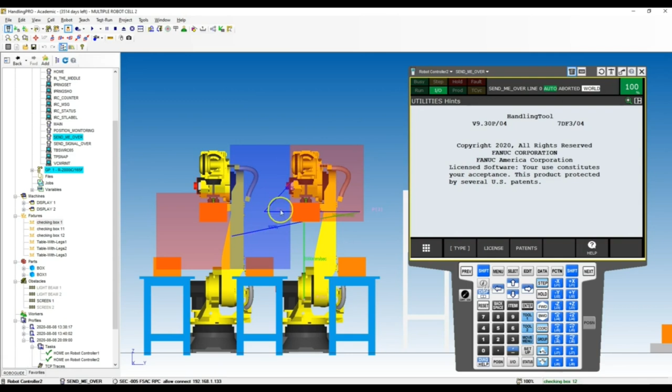Video number 6, we're going to run through a little bit smarter coding for stopping a robot when it's in an unsafe position. And we're going to be utilizing the digital inputs and digital outputs for this scenario. So I'm just going to run through the program just to show what it's supposed to do.

So you can see as it goes into the center, holds that position, moves out, and then it continues on. Holds position when it's in the center. So one or the other robot will always hold position inside the red box when the other robot is in the blue box area, or the area in which the two robots can collide.

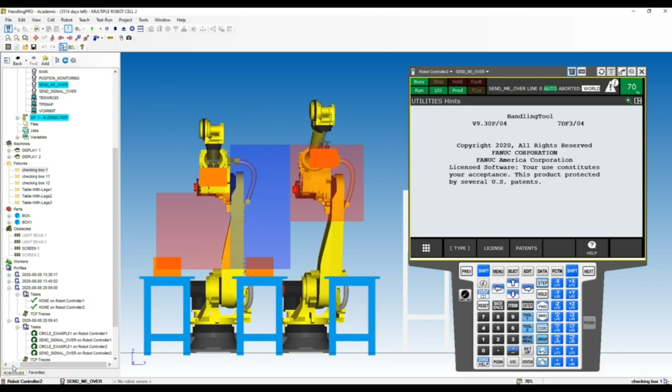Alright, so the program is done. So let's run through the code. So just running through the code here, we have circle example number 1. I got rid of the blinking lights, so now we're going to be utilizing just digital in, digital out to do all the programming. We're doing a loop for 4 times, circular motion. This one is running at 70%, and I do believe the other robot's running at 40%.

We have an argument stating that we are running, so argument register number 3 is set to 1, which means we're running. When it's set to 0, it means it's not running. So when we set up the other programs, we have to look at this argument. Do we want to run it in the background, or do we want to run it as code in parallel with our circle example? Because then we're going to utilize the argument to run that.

So also with that, if we go to the cell, go to ins and outs interconnections, we have an input and output. So we set this up in previous videos. We have digital output 1 sending to digital input number 1 on robot controller number 2. So robot controller number 2 digital output will send to controller number 1 digital input number 1. So we're sending signals back and forth through the 1 slot and 2 slot. So digital out from one goes to the digital in of the other, and vice versa.

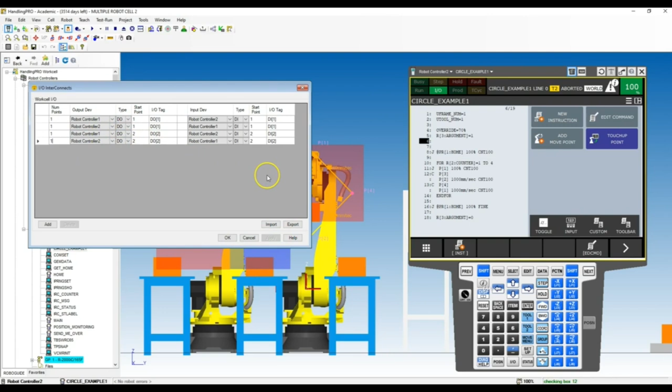So we're going to utilize the digital 1s to say that, hey, I'm in these red boxes. We're going to utilize digital 2 saying that, hey, I'm in this blue box, which means I'm in an unsafe area. So let's start setting up a new line of code. So let's go to select, and I'm going to create, and let's call it send over to robot. And then I'm going to go to detail.

Now we're going to completely run this as logic. There's going to be no motion groups. So we're going to turn off the group mask from 1 to the asterisk so that we can run this parallel with our motion. So I'm going to go inside here. Let's go edit. And the first thing we're going to do is make sure that the digital outputs are off. So let's go new instruction, output, digital output 1, and we're going to turn it off. And then new instruction, digital output number 2, and we're going to turn it off as well.

Then I'm going to insert a bunch of lines of code, and we're going to continuously loop this over and over again. We're not going to run this as background logic, so we're going to add label number 1. And now what we need to do is set up an if statement. If we are within this red box, and we're not looking at depth right now, we're looking at a completely 2-dimensional box. So when it goes into this box, we want to send a digital signal.

So I went ahead and found these numbers. So it's the top left corner and the lower right corner. Now, right now we are working with robot number 2, so we're going to be utilizing these numbers. So for this top corner, the Y component, which is left to right, is -174, and the Z component is 1500. The Y component for the bottom right corner is 477, and the Z component is going to be 900. Now, when we write the code, we have to write it as an if statement.

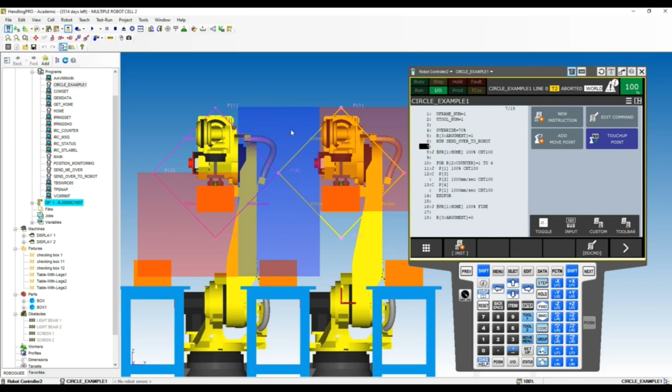So now we also have to figure out, okay, are we in this position right here? Now this one we can monitor at all times if we want to, so we can run this as a background logic. Now, do we have to run it as a background logic? No, we don't have to. We're going to just set it up a different way, so it just shows you the 2 ways of running a digital code. So running send over is running it parallel, and then in the background we can run it as well in processing, which runs over and over and over again.

So let's just go select and let's create a new program, and let's call it in the center. Go to detail, and let's turn off group mask from a motion to a digital logic, and let's go to end. Now this is a fairly easy code, mainly because when we're looking at robot number 2, is it less than this number right here? And if you don't remember what that number was, it was negative 174.

Okay, so if we're less than negative 174, let's go new instruction, if statement, and we can do it as a simple if-then statement, which allows us to do an else statement. That's why I use the then. So if register number 11, which is our Y position, is less than or equal to that negative 174, that means it's to the left, which is in this area right here, then we're going to send digital output number 2. Number 2 represents that we are in the middle. IO, digital output number 2, and we're going to set that to on.

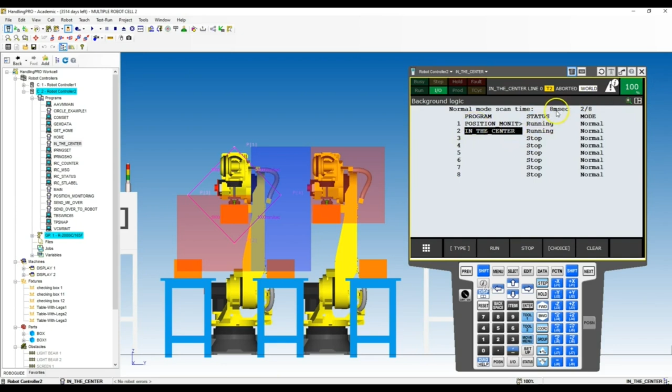So now if I go back to select, everything is now set up for robot number 2. All we need to do is do the same thing for robot number 1 and just change some of the numbers. Now we can do this really easily by sending the program over to robot number 1. So let's go to robot number 2. Let's find the send over to robot, right click on it, export to robot, and let's go to the right icon here, and then we need to find that cell.

And then we're going to send it to robot number 1. So we select, and then we hit export. It'll establish the FTP, which is File Transfer Protocol, and we're going to hit done. Okay, so now that is sent over. Let's do the same thing for the in the center. So let's click the in the center, right click, export to robot, and this path is all good, so we just go export. Done, and now we have that for our robot number 1.

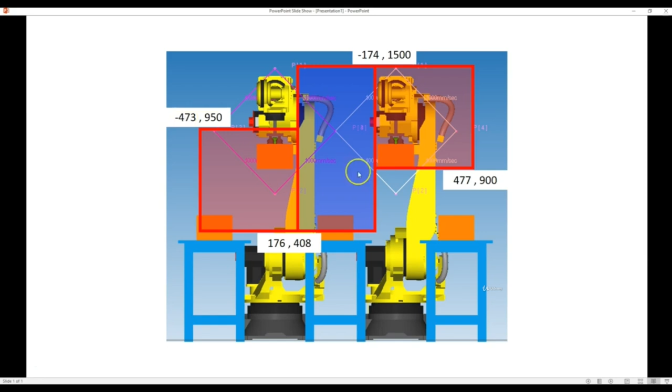So let's go under robot number 1, and let's go to send over to robot. This switches controllers from robot controller number 2 to robot controller number 1. Let's go into that program, send to, and all we have to do is reset these numbers. So if you remember, this is going to be negative 473, 950, and then 176, and then 408 for the other side. So let's go inside here and set this all up.

Then all these other items are going to be the same. Nothing's going to change on that. Okay, so now let's go to that circle program, and let's add that line of code so we're running. So we're going to arrow over, instruction, and we're going to next, multiple control, run, and we are running the send over to robot.

Then we need to send that background logic. So let's go menu, setup, background logic, number 2, because again, these are 2 different controllers, so you have to set them up on both controllers. Choice, there is our in the center, which we do have to change, so let's change that first. So let's go select and find that in the center, and that center is going to be 176.

176. Now we need to change this before we turn it on, because as soon as we turn it on, it's going to give us an error here if we try to change this. So let's go back to that background logic, and now we can run this. So if we go running, now if you ever need to change these programs, you do have to stop that status. So just hit stop, and then you can change it, and then just go back and run it again. If you want to get rid of it, just hit clear. So stop and then clear.

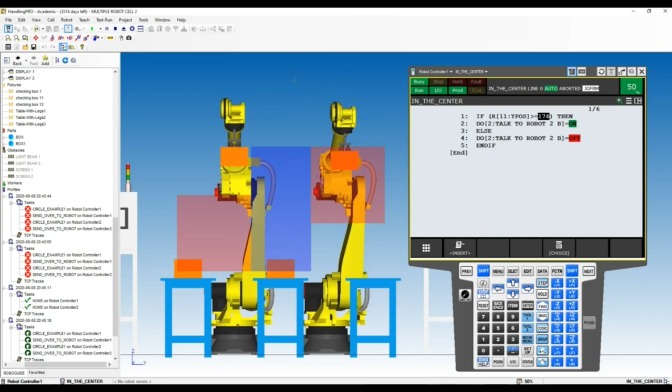So notice how it holds until it gets out of that position, moves in. We are in the blue area, so that's going to come to controlled. Let's hold. This is holding. So you can see everything is working perfect. So it doesn't come to immediate stop, remember, because it is a controlled hold. Complete stop is bad for the robot, or not as good to the robot as a controlled hold.

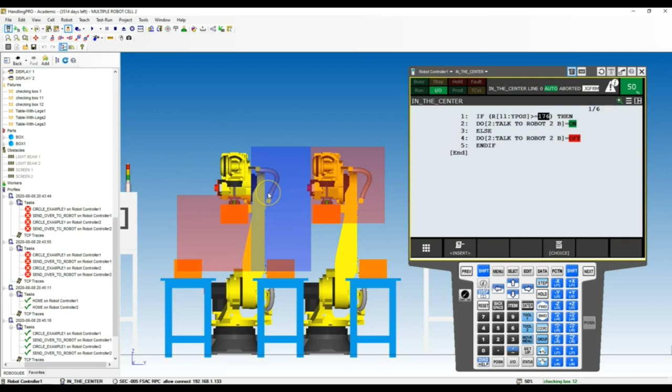There we go, and we're running the end. So that is running with a little bit better code in our unsafe area. Now again, keep in mind that we are pushing the limits of both of these robots being in the same position over and over again. Circle, circle, circle. Most likely you're not going to have this scenario where you have 2 robots going in at the same time and the same program over and over again. So writing code that will help determine whether you're in that safe position or not definitely helps. And you can utilize the digital ins and digital outs to help that.